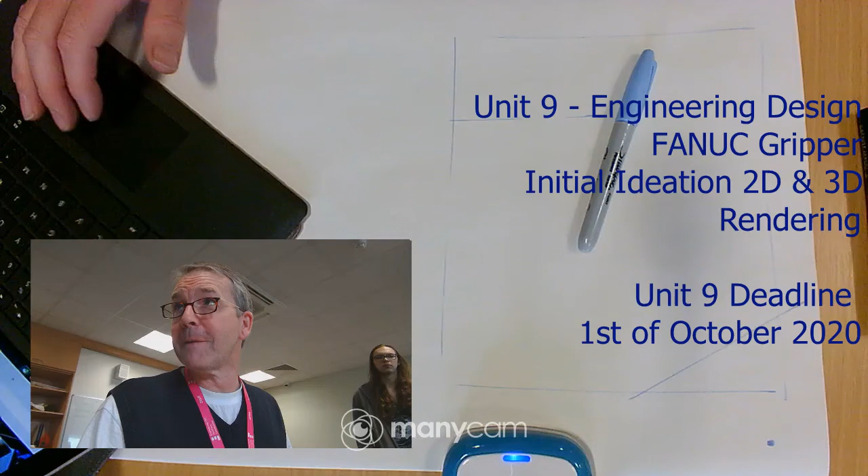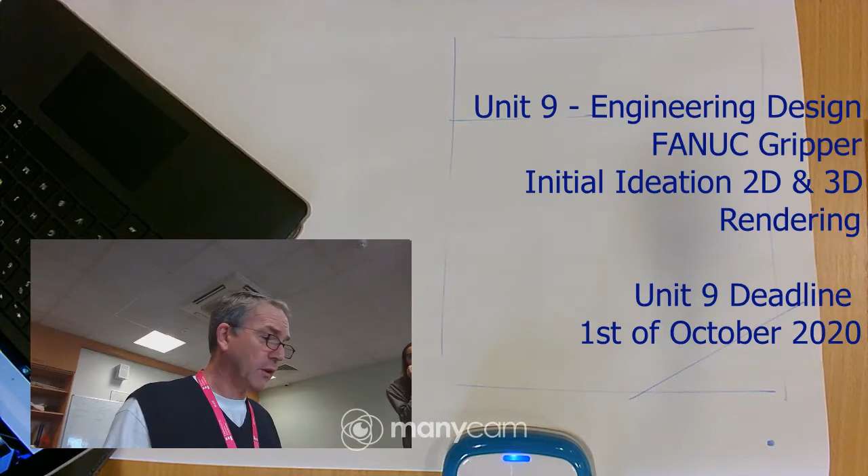What I'm going to do is put together a 2D sketch and a 3D drawing. This is the sort of communication you should be trying to get into your Unit 9. It covers all the bases for informal 2D sketching and drawing, and if you can get it to this standard and pick up some of these notes, you'll have distinction criteria you can assess with.

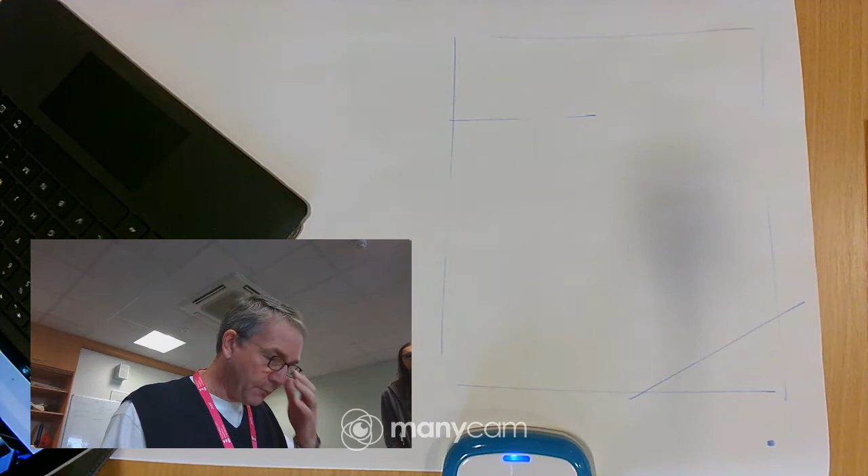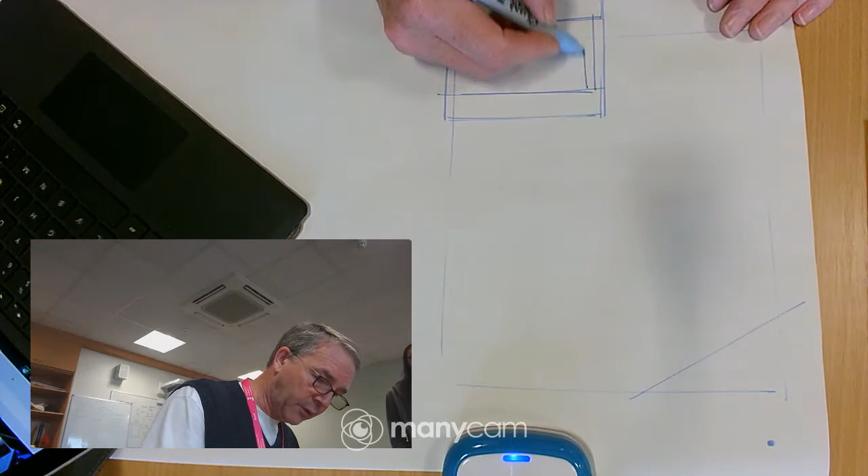So, picking up on a range of ideas, I'm going to go for a square first. I'm thinking about how I can work with a block - a very simple clamp. You know the project you've done downstairs with the clamp, that's the toolmaker's clamp. It has two running bars going through it, and those bars operate off some sort of screw thread.

Forward so people can see it. For the circular object we're going to hold, I'm just going to put two curves in. I'll keep it as simple a drawing as I can.

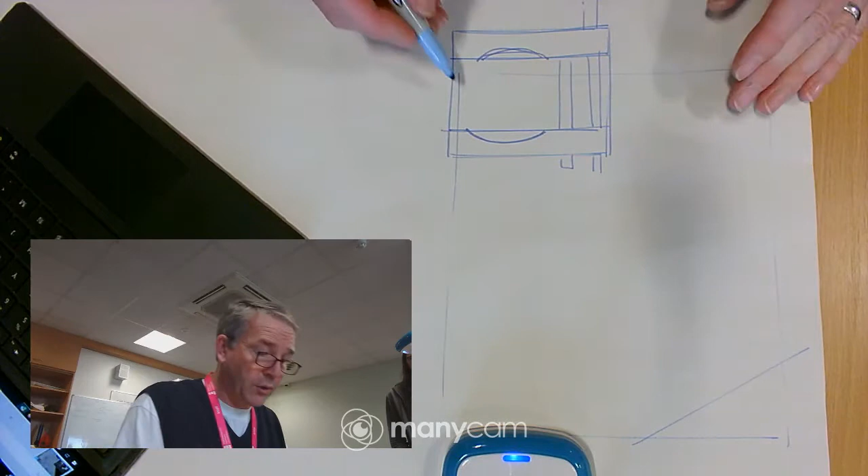Now I'm drawing in a blue marker - I like blue marker. I won't rub anything out, I'll just colour over it and it'll get darker, you won't notice, and it'll give it a nice sketchy feel. Do it in pencil, do it in ballpoint pen, it's up to you.

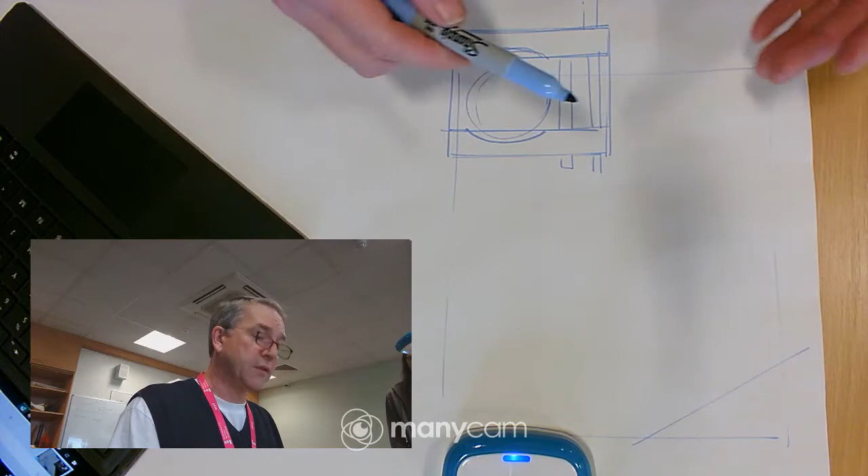Sometimes working in a lighter colour lets you do the sketching first - this is the hard work, the thinking. I'm going to need some little pads in here to cushion the object if I'm going to be holding it. I've got the screw threads going across here, there might be some sort of motor up here, and it's going to slide on that so it can open and close and hold the object. So I've got that part of my drawing there.

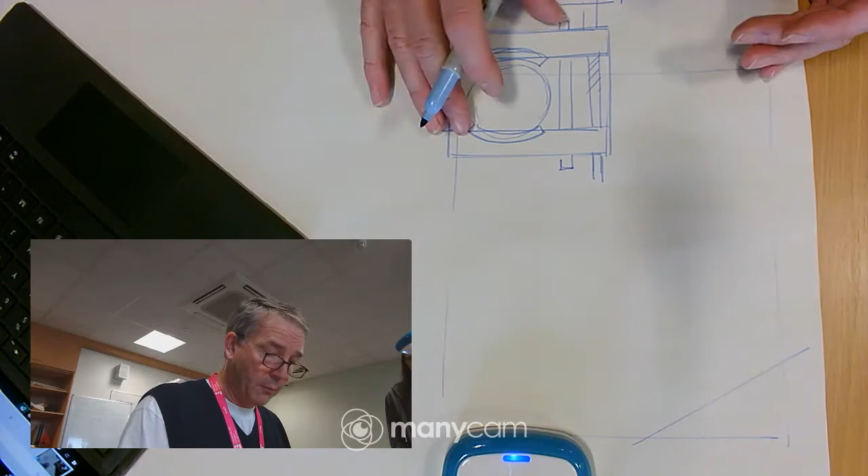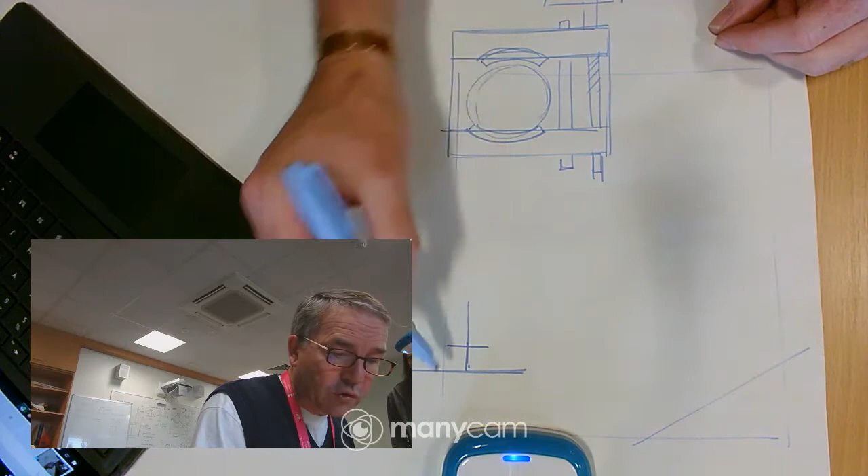It's translating that from 2D into 3D that we really struggle with. But the reason I've gone for something simple like this is if you want isometric, you need 30-degree angles. Now you can get a protractor, that's fine, or a little trick is draw two squares like so, and simply find that halfway point there, and if you sketch out a line, you'll get an angle of about 30 degrees.

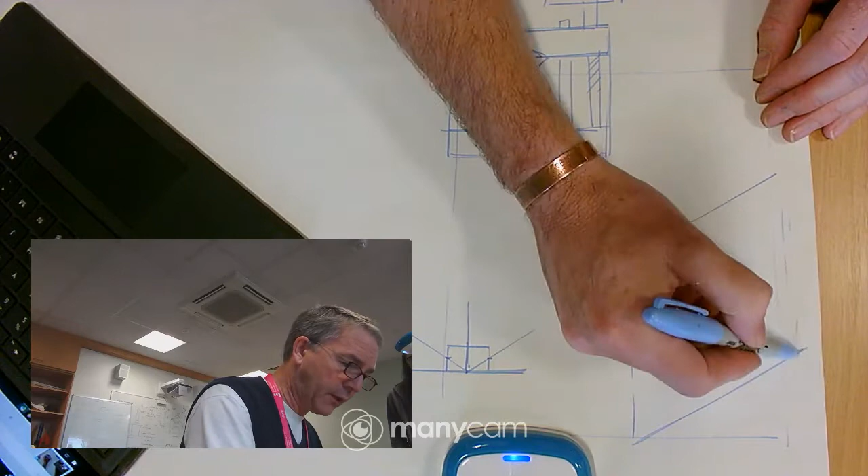Now, for drawing this in 3D, what I need is just an isometric set of rectangles, almost like a cube, but this front end is going to be quite short. If you imagine we'd do the engineering drawing of this, that would be sort of 10 millimeters by 20 millimeters, or whatever decision I want to make.

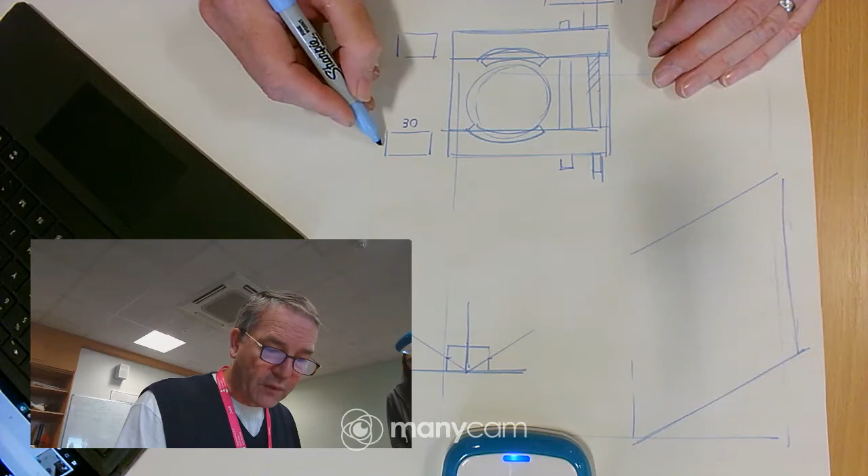I want to grip something, so maybe we'd call that 30 millimeters, and that would be half of that, so let's call that 15, and we'd go like that. So in that case, I'm going to need that on my rectangle that I'm going to work in here. So 2D to 3D - there's my 2D.

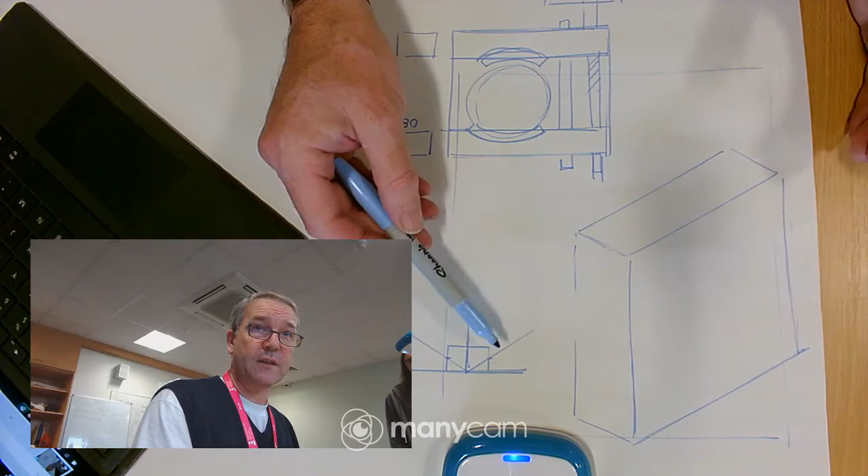Would the halfway not be like 22 and a half? It would be, but it's an angle - it's not 45 degrees, which is too steep, and it's not too shallow, it's just somewhere in between, so it gives me an angle. But I like that you've done the maths - I'm impressed, that was a shock, I couldn't do that in my head. How did you do that? 45 divided by 2. Cool, that's clever.

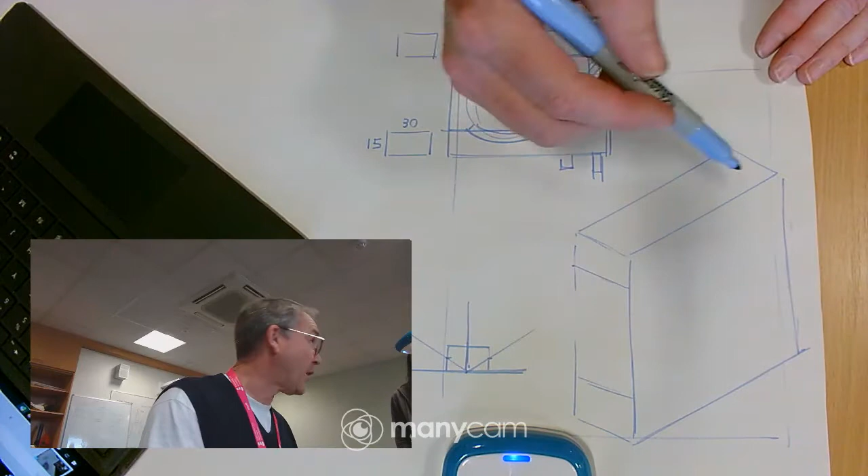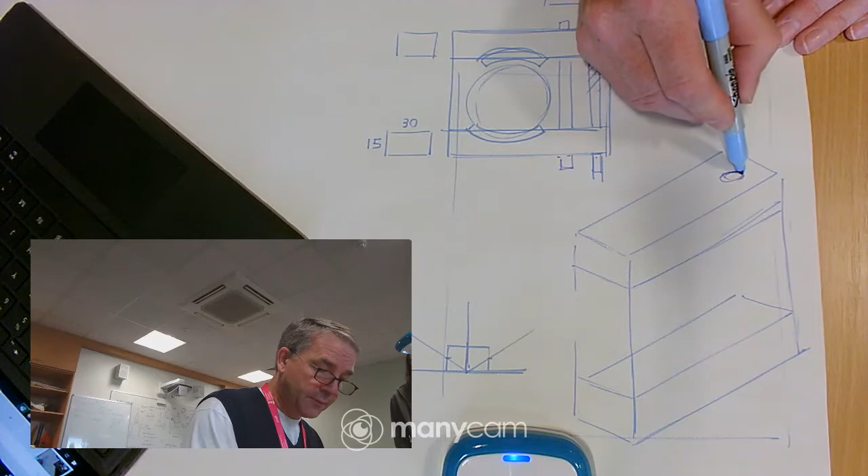Right, so my design's quite simple, it's effectively just two rectangles like so. And then I can see the inside - again, if I'm doing this very lightly in pen, I can draw an object and then draw over it. I've got two holes, so I've got two ellipses, and they're going to line up all the way through, like so. And then I've got my two curved areas here.

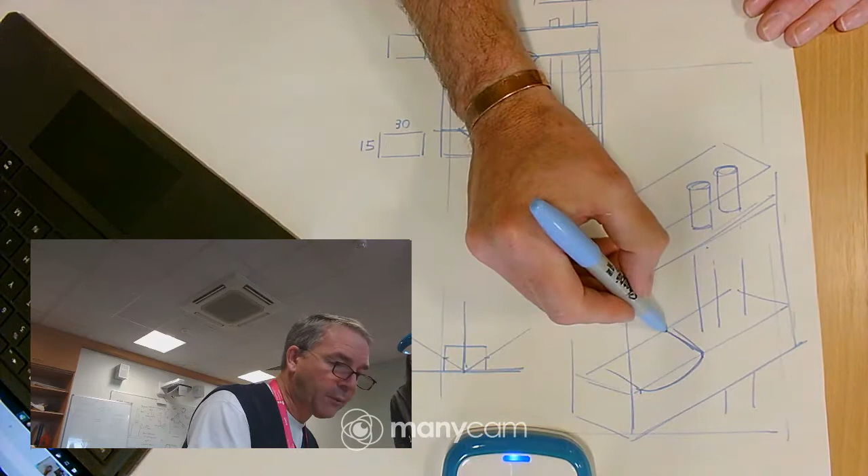That line's not quite in the right place, and this is the great thing about working in a lighter pen - if the line's not in the right place, you can just fix it, you just fix your drawing. Well, actually, we could do with these being a little bit longer, so just pull those out a little bit.

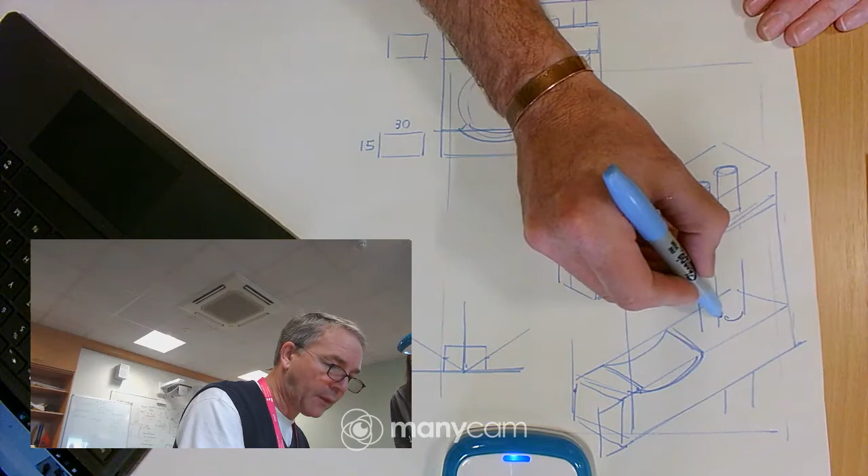I've got a rough outline of how my design is going to look on the page. I've got a bit of space for some text, and I'll show you what I want you to do there. You'll notice I've got a bit of an outline box to frame everything, and that's going to cut through there, so it sets that up on its own page.

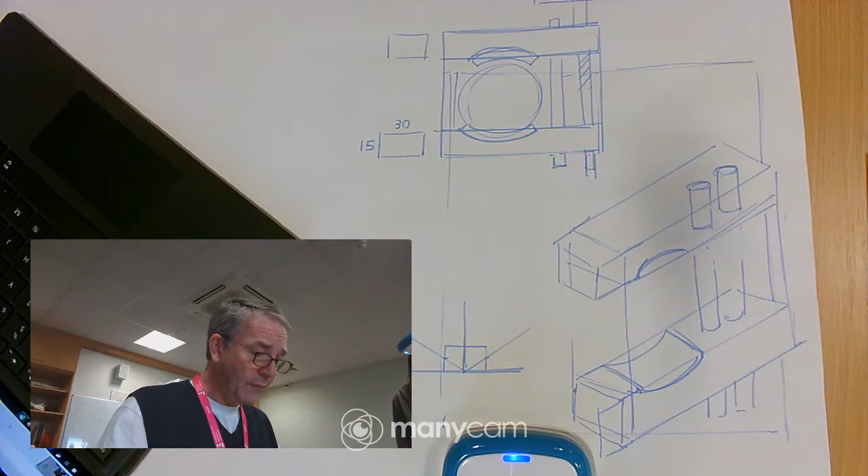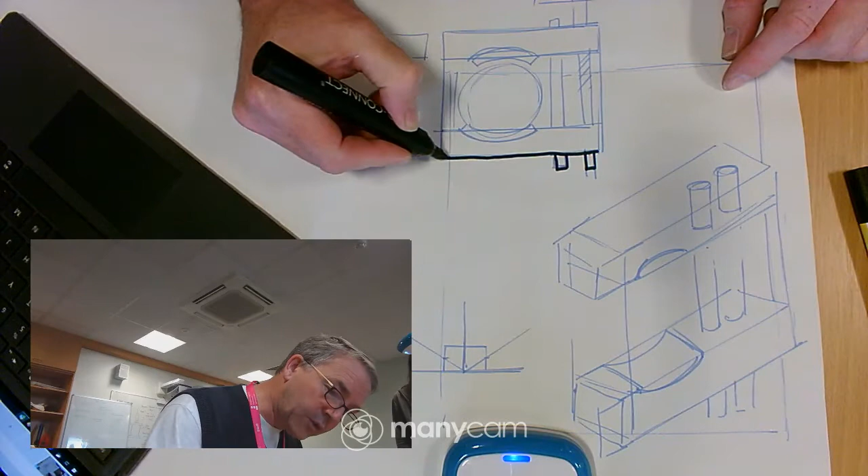That's the creative bit, the hard bit to some extent. The next bit is, to some extent, colouring in and lining it out. Get yourself a dark marker, hopefully something with two thicknesses, or get a thin marker and just do two lines twice. This is just the formal part of your drawing. You could do this with a ruler if you wanted these lines to be really neat, but I like it to be a little bit loose and sketchy.

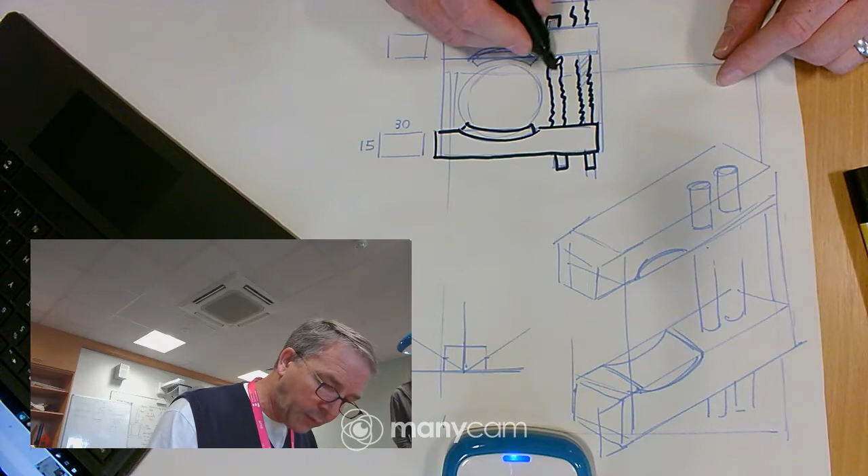Now I'm starting to think about textures. This is a screw thread, so it's going to be a little bit like that, but I'm just trying to create that illusion by putting a few lines across it. When somebody's viewing this as a drawing, I just want them to recognise that these are threaded, so I've put little lines across it just to create that message.

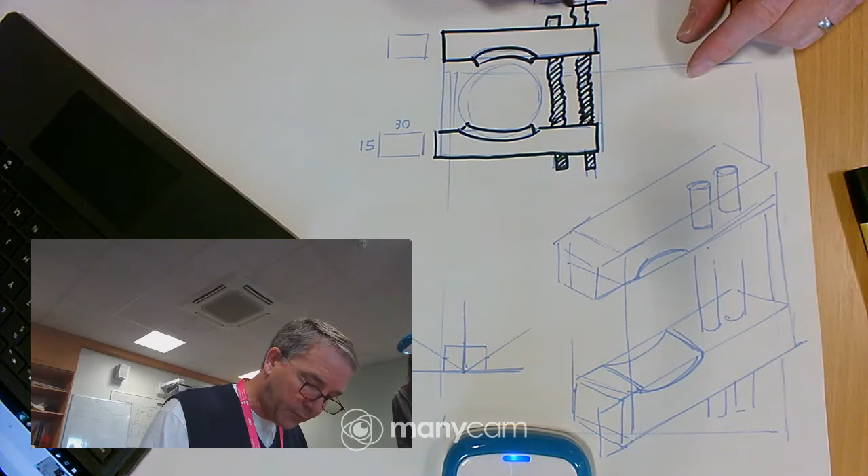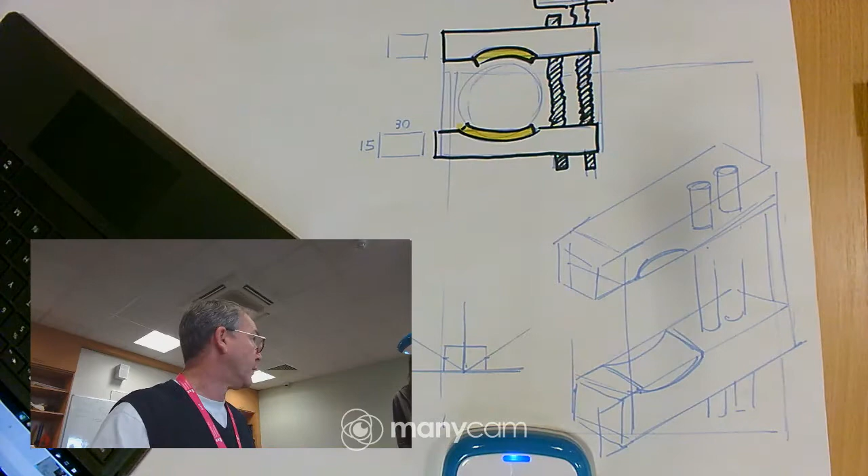There's that outline, and these pads here, I want to draw attention to. So I've decided I'm going to colour code as I go through my drawing. Everything to do with a cushion or a pad, I'm going to use yellow on each of my sketches. As you go from drawing to drawing you'll start to recognise it, it's almost like an accent to the drawing, adding a splash of colour and drawing attention, but also giving you a consistent message through all the designs. That's the bit where it's cushioning, a little bit of colour coding.

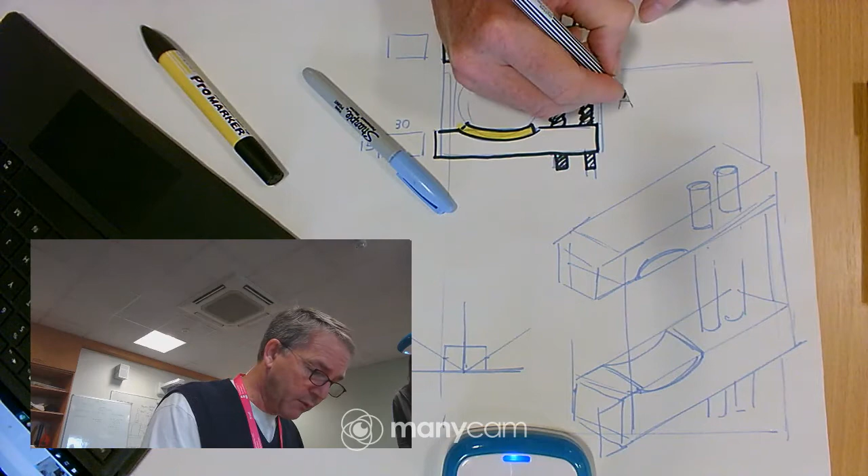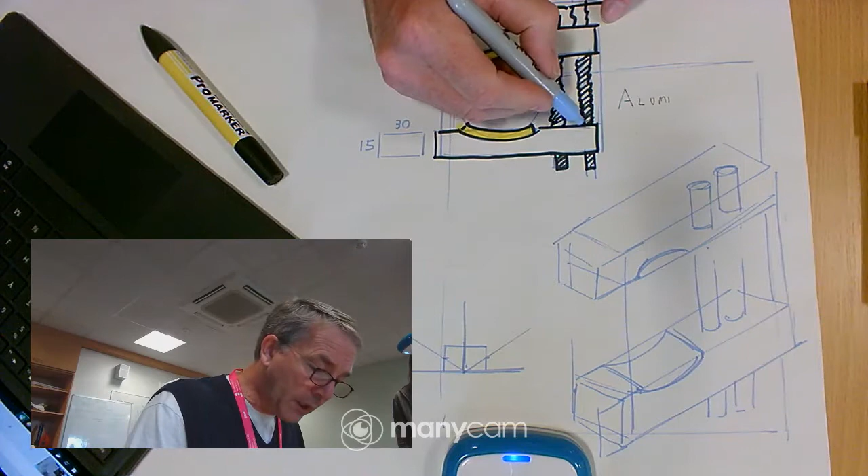I want this to be metal, I'm thinking it's probably going to be made out of aluminium, so I write that on there. I'm going to start labelling materials and stuff like that, so I'm also getting the materials and manufacturing part of the assessment - have I identified materials? You've got a research section that's separate, and that will inform your decisions about what material to use. So if I want this to look a little bit like aluminium, I'll go back to my blue pen and give it some little highlights, just some reflective lines, since metals tend to reflect in straight lines.

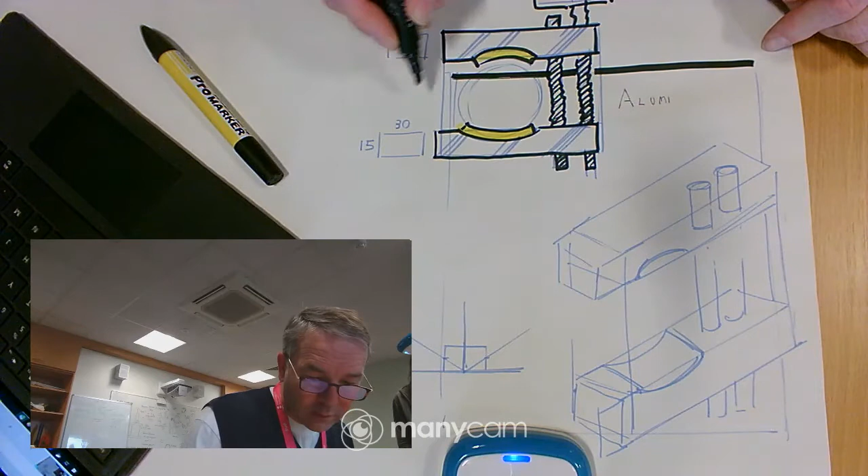So I haven't got a massive amount of colouring in to do, and then I've got a design. This border is going to come across here, through there, and drop down through there. I'm going to use these later on - that's going to be an important factor.

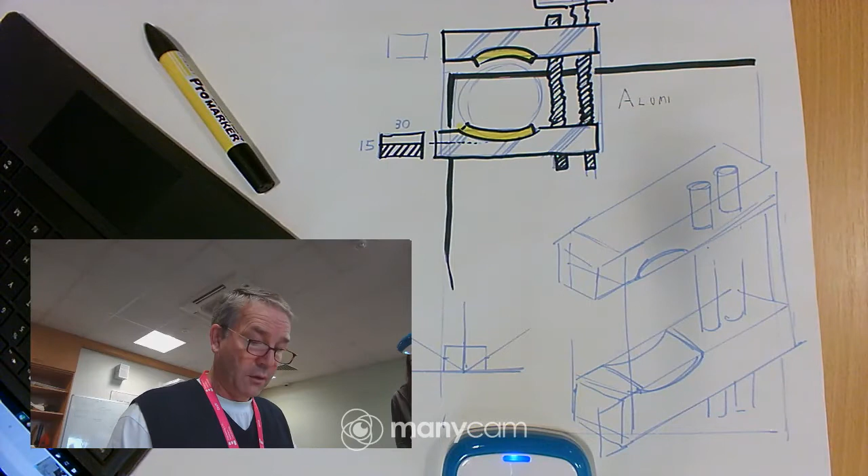If I draw a line across there, a dotted line, it's a bit like doing an engineering drawing. That section there is something I'm going to do some maths and calculations on - we are actually going to be cutting it out, so it looks like it's cutting out on the curve. So you'd have a piece of aluminium, and then we cut this curve into the aluminium. I'm going to describe that in my notes.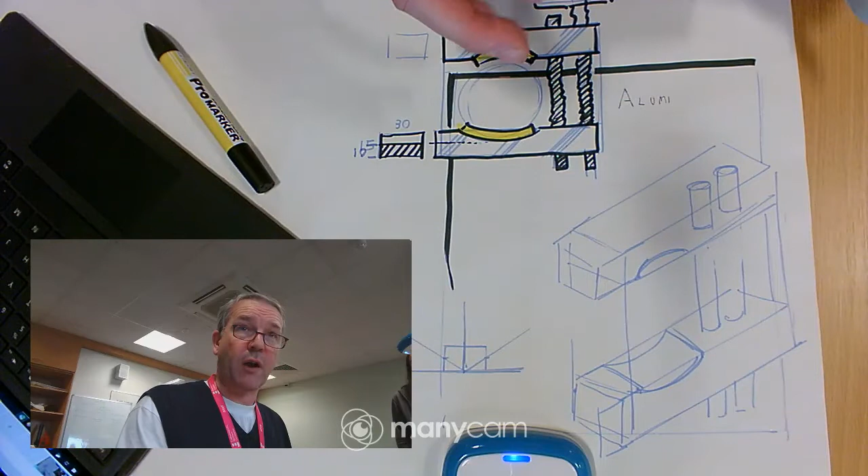I'm also interested in this thickness here, the depth there would be about 15 millimetres, and it's only really going to be useful for one object. But that was the brief, to hold an aluminium cylinder. If we were going for a more complex grabber, then we would definitely go for much more complex ideas.

If you've got more complex ideas, there's no reason why you shouldn't record them now. If you suddenly have a brilliant idea, you might not need it for this project, but you can definitely use it for a different project.

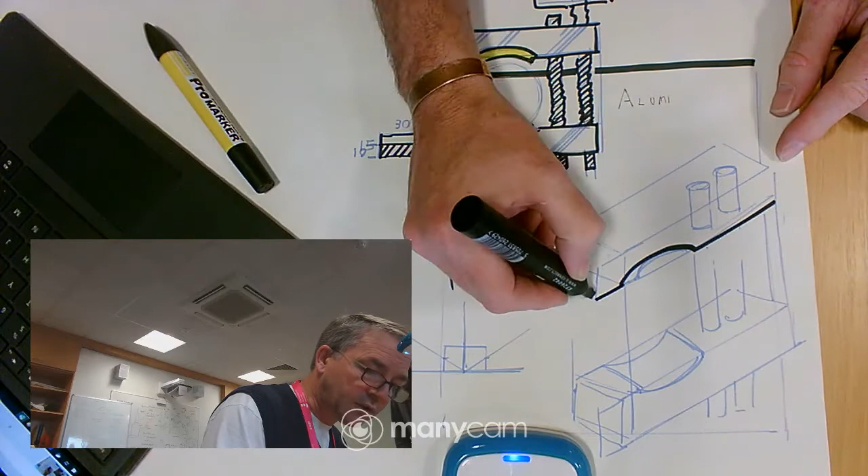I'm going to do the same thing here - all I'm doing is just outlining the drawing, really. This is firming up the decisions that I've made. Just remember I extended this slightly, so the blue lines are now fading into the background.

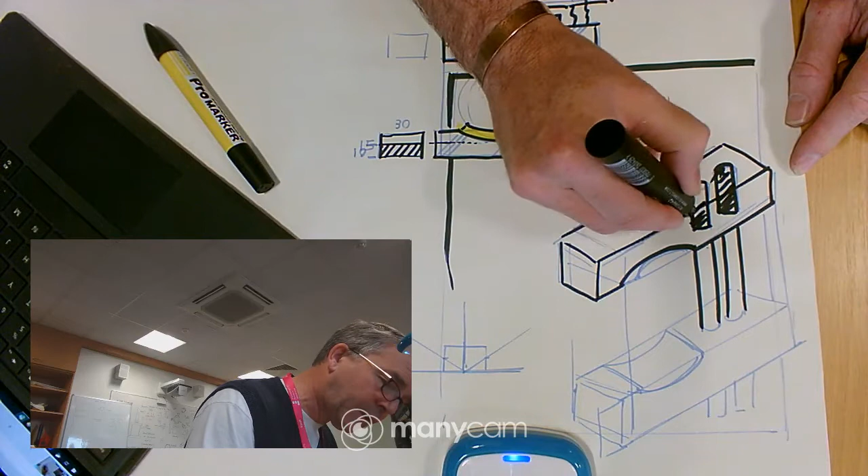There's my screw thread. I want that to line up with that. Curves are a bit tricky, it must be said - they take a bit of practice.

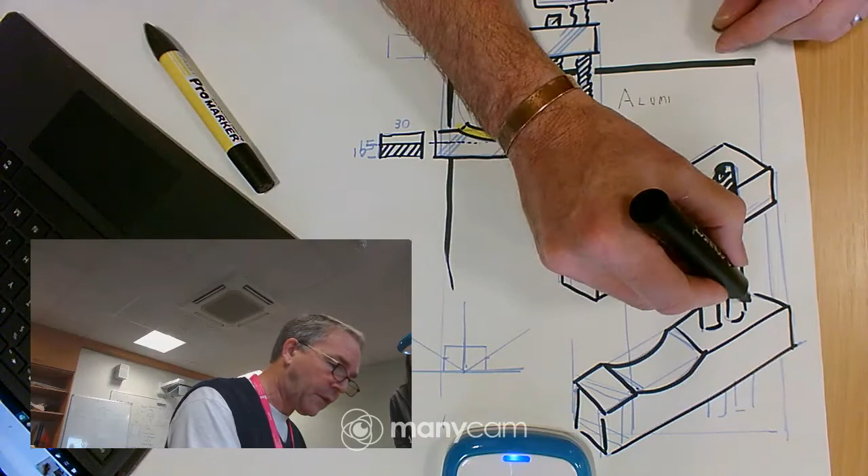Okay, put a bit of colour down there. Working with very soft felt tip pens gives you this much more easy flow. Softer tip of the pen, and you can also get the thickness going.

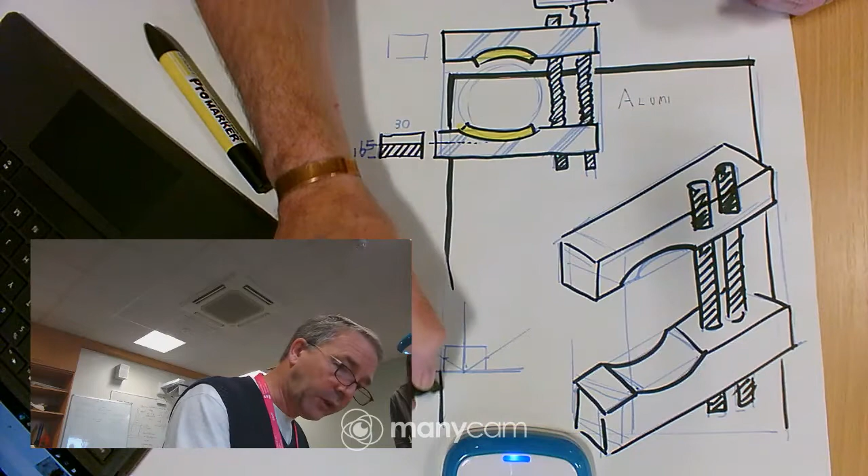One of the things you can do is get a drawing to stand off the page. You can see this is sort of 3D, but to help it stand off the page more, go for a darker outline all around, again with a slightly softer tip pen. That darker outline, we call it outlining, helps the object stand off the page.

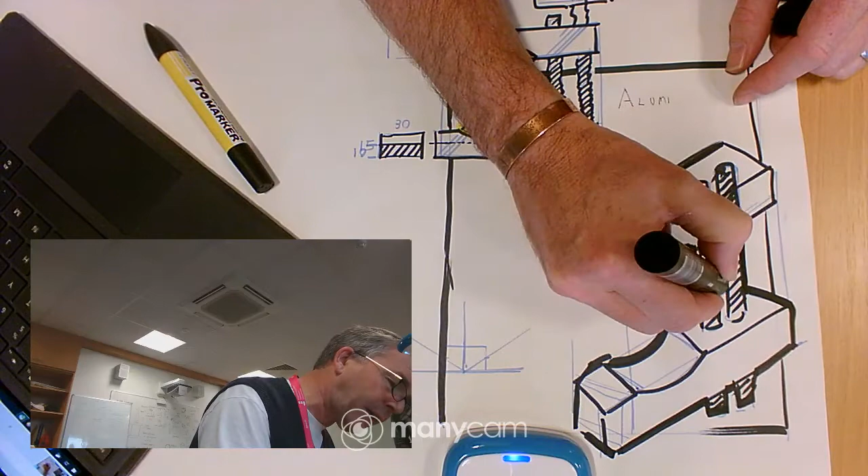Now, we always say the light's coming from the left, from this sort of direction. So if I do a little bit of a reflection shining that way, just to remind myself where the light's coming from. Where will the shadows be? Well, the top bit's going to pick up some horizontal shading. Just imagine the light's catching the metal and reflecting.

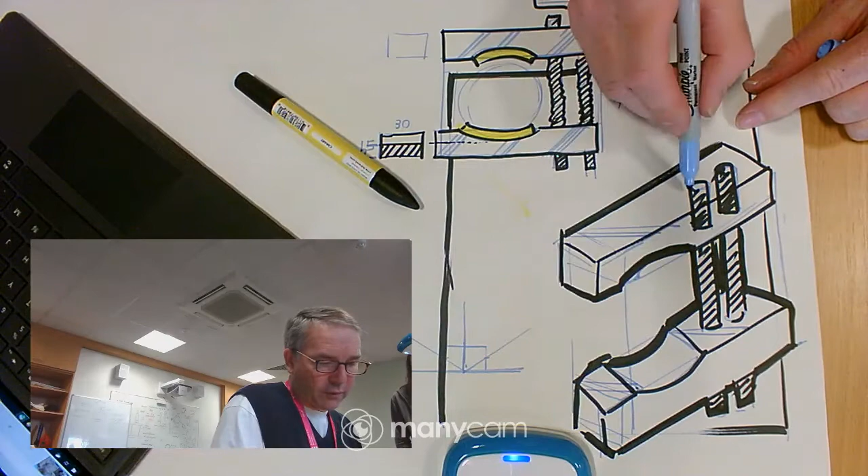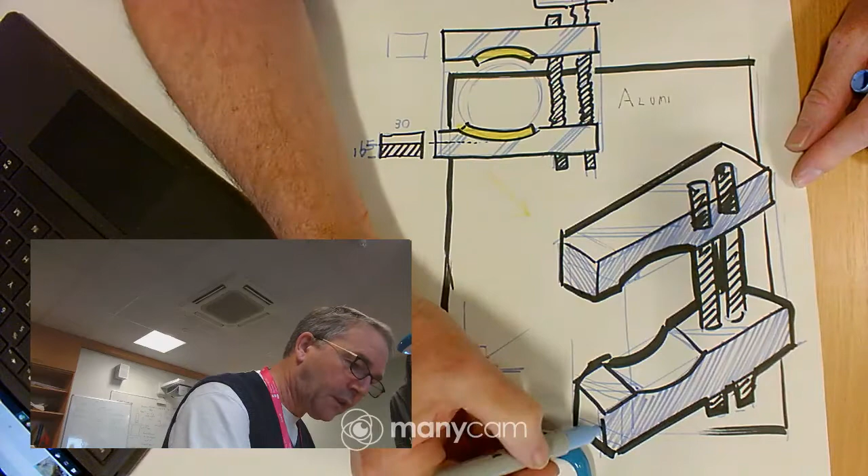This edge is going to be medium and this side's going to be dark. So most of this is going to pick up that shading. I'm mimicking the diagonal reflection I had here. This is going to be somewhere in between. So I've got light, medium and dark shading on my design.

I've got highlights that suggest the texture. I've got the texture of the screw threads coming through there. I'm going to add a bit of shadow in there too, because the light will be shining on them from this side, and that will create a shadow.

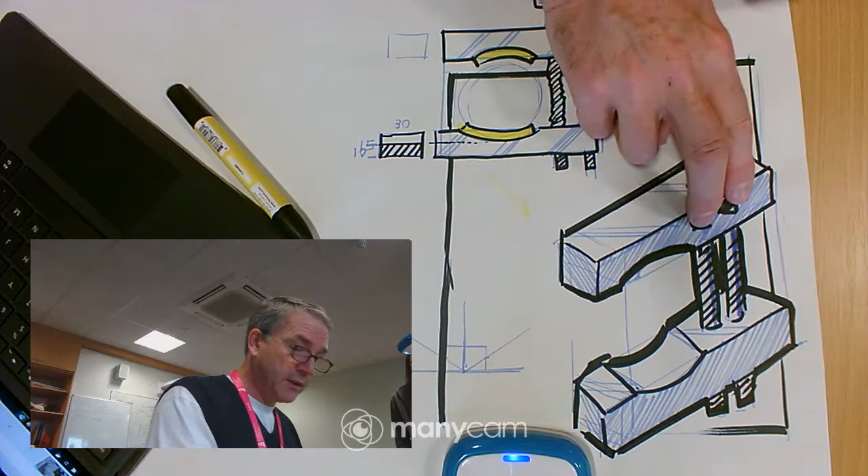What have we got there? I'm already noticing I've made a mistake here. These two pieces come down far too far. I'm going to live with that. If I was going to a client, I'd be redrawing this, but for my purposes at the moment, it's just illustrating the point. It should have stopped on these two circles. When I drew those, they should have gone up there like that, but I've gone in the wrong direction.

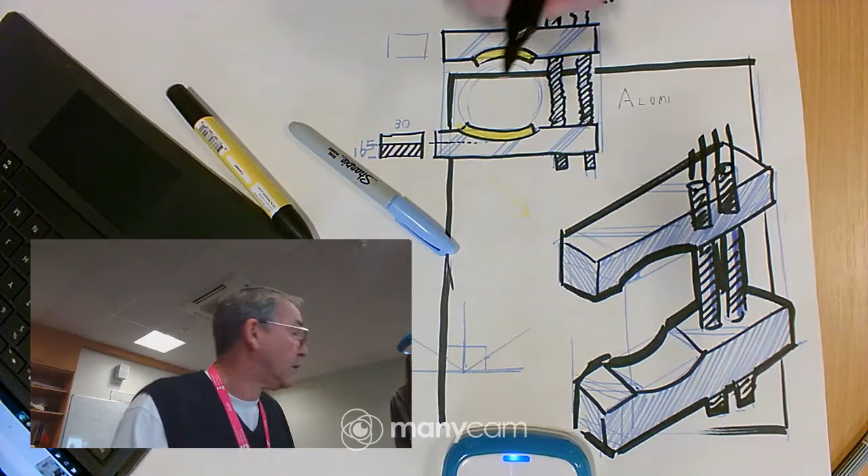Make mistakes, that's fine. You'll notice I'm actually working upside down as well, so I'm working your way, not my way. That does make it a little bit more tricky, but I'm not worrying about that.

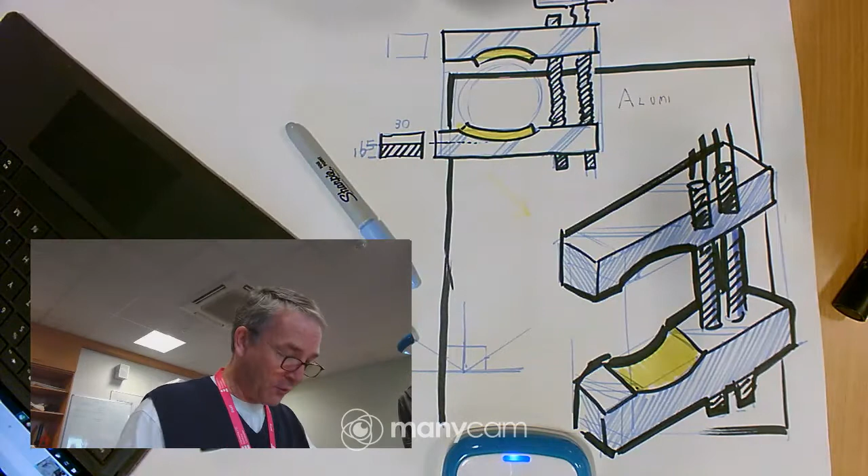So I'm going to go with my yellow. Not as tricky as writing aluminium upside down. Well, I gave up, as you'll notice. I'm not good at spelling at the best of times, and doing it upside down at the same time is pretty rough. Alumin... yeah, does that look right? Maybe I can do it that way, maybe I can work on here like this.

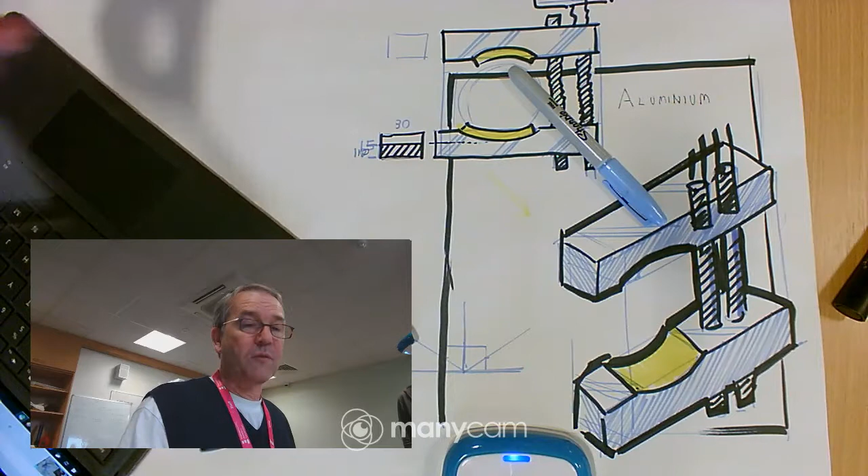So I'd said that was 15 millimeters. We're going to do the second moment of area on these. The follow-up video to this will be doing some calculations.

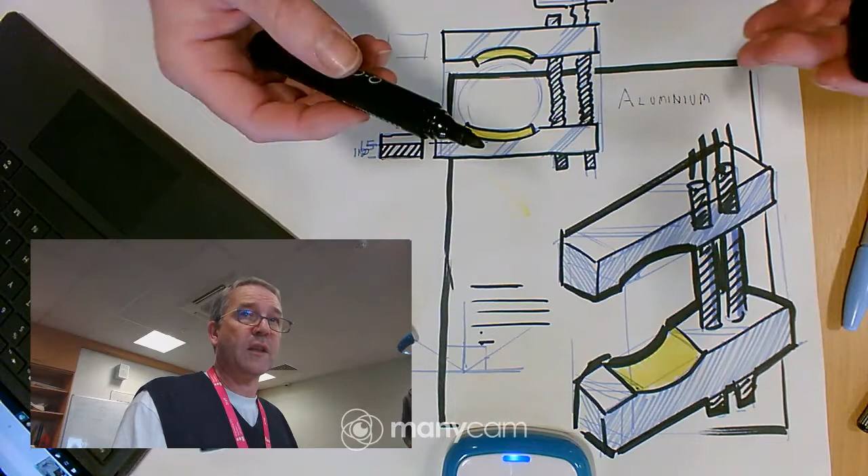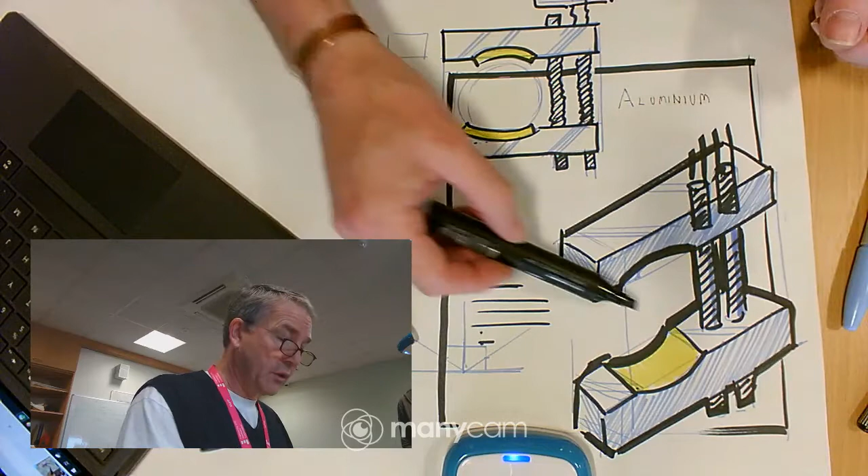I would encourage you to use your research on materials and manufacturing. For this, I think the manufacturing process, so let me give myself a little title here, would just have a block of text saying I'm going to use aluminium because it's stiff, it's hard, but it's light, reasonably hard wearing, and easy to machine, so it's easy to manufacture. In reality, you could cast this shape, but that's a lot of hard work when you could just buy some stock material. I'm going to buy stock aluminium, and I've maybe got a milling machine that's going to simply mill out this shape, and a drill that's going to drill these two holes, and I've basically got the two components I need. I'm obviously going to need to cut a thread through here.

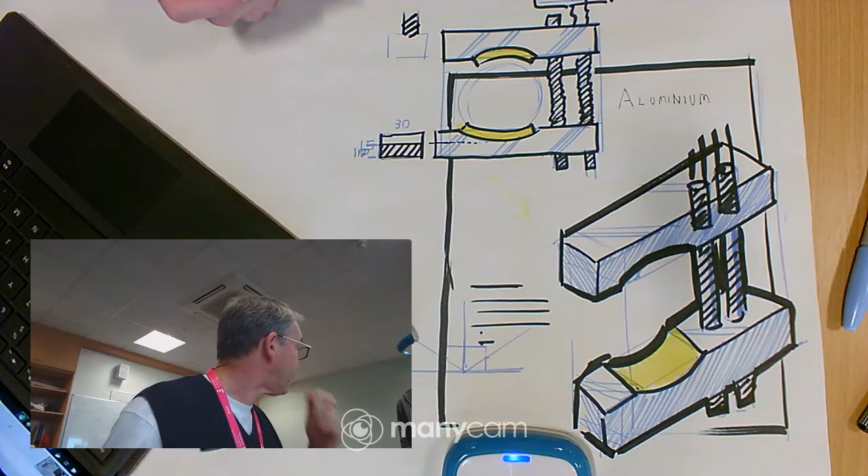It's 30 millimeters wide, so I don't quite know what I'd go for there for a thread, maybe an 8mm thread, something like that. These are decisions you can start making on your drawing, but remember, it isn't a final idea, so there's time for you to go away and think about it.

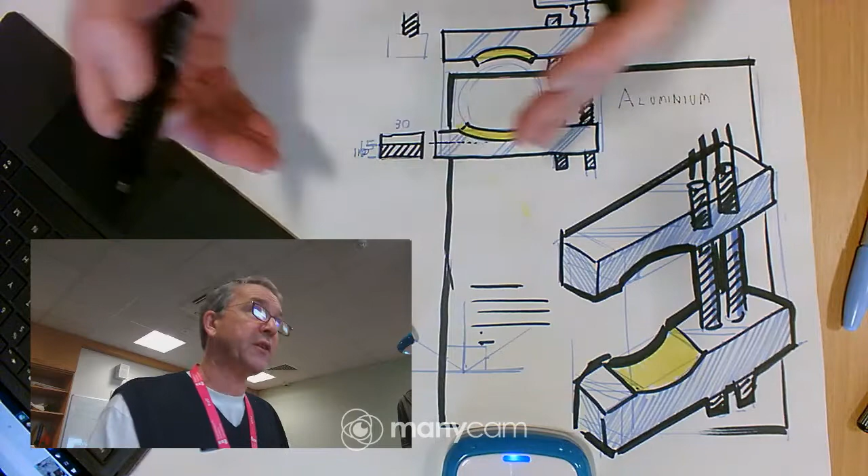I'm going to save this space here, and what you'll see is I'm going to do the cross-section. I'm going to calculate the cross-sectional area, and then calculate the inertia, the second moment of area. Then I can evaluate this design against other designs, saying whether it's strong enough, or could be stronger, or if there's a way to make this design work using even less material but get more structure. So are you happy with that as a layout and transferring from 2D to 3D?

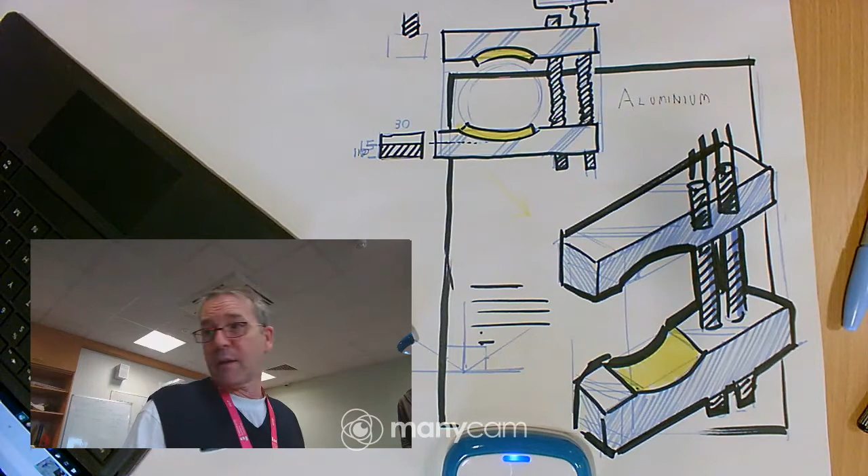That's really what I want you to push on, not just one idea, but 2 or 3 ideas done like this. So if you've got your 2D sketches from last lesson, you might have 5, 6, 7, 8, 9, 10 of those. You're picking out 3 or 4 now, and starting to think to yourself, how would I actually get this made? What would I actually need to do?